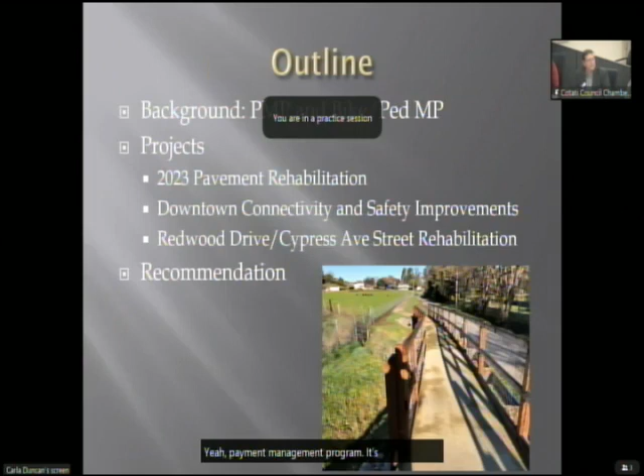These are routine pavement maintenance projects that are done methodically over the years to keep ahead of the wear and tear that the roadways undergo. This is the outline of the presentation today. We'll talk about the pavement management program, PMP, which lays out the systematic approach whereby we prioritize the roadway projects, then talk about the bike ped master plan, and then go into the 3 current projects in front of us tonight. And then we'll conclude with the recommendation. Oh, I'm advancing them on my computer, but not up there. Yeah, pavement management program, it's like the 3rd or 4th slide in. Okay, right there. Thank you. I'll try to remember to ask you to advance the slides.

So the pavement management program is a state mandated program which has a StreetSaver software program. Every 2 years, we're required to have that updated to remain eligible for federal and state street grant money. It involves an inspection of each one of our street segments. We have something like 200 plus street segments that are walked every 2 years by a certified inspector that will categorize each segment by its condition. The condition is defined by pavement condition index from 0 to 100, where 100 is a new street and 0 is degraded to nothing.

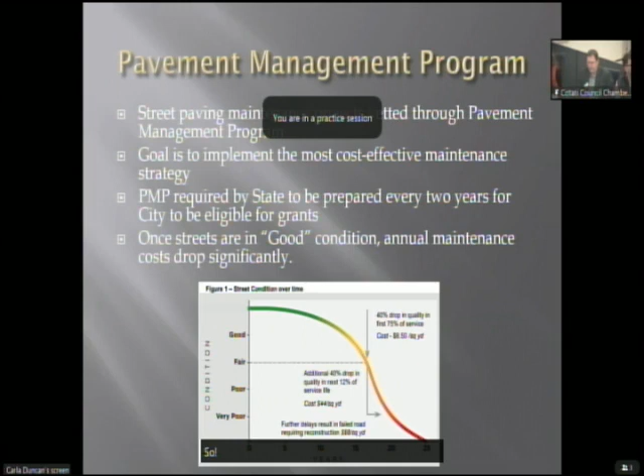Any street that's below about 26 or so is in very poor condition. We try to get our roadways up to the 70s, high 70s, or even the 80s, and that would mean annual treatments would be much less expensive. We just do very cost-effective slurry seal treatments and avoid the costly reconstruction. So just as an example, please advance the slides. Just 5 years ago, our PCI was 55, and this is looked upon as a city with its streets at risk, which means it needs attention. It's about to drop off to the very poor category.

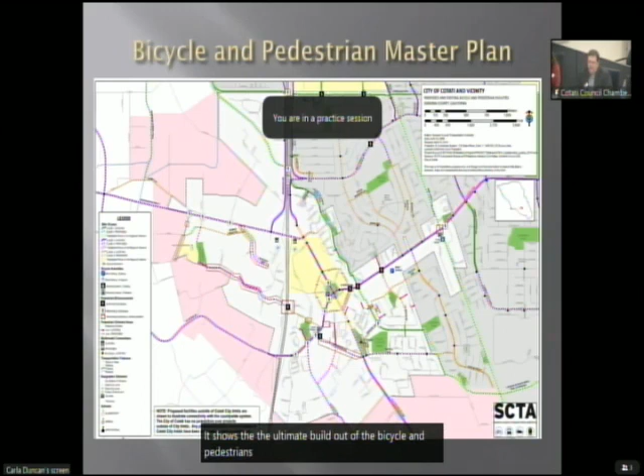The city has a bike and pedestrian master plan, and this is a figure out of the master plan. It shows the ultimate build out of the bicycle and pedestrian pathways. Then the next slide, please, shows a close-up with the legend superimposed there. Any solid line, independent of its color, is an existing Class 1, Class 2, or Class 3 pathway. And then if it's dashed, it's proposed. It doesn't exist today.

The staff refers to this figure when we have a street maintenance project. So we'll come back to this and say, oh, we're doing West Sierra Avenue, for example, and we notice that there's a purple line through it, which is an existing Class 2 bike lane. And we'll be hearing about that later on in the presentation. As time goes on, there's additional tools that Caltrans comes up with in the industry to make Class 2 bike lanes safer and increase signage, increase striping. And so even though this was an existing Class 2 bike lane, you'll see in the course of the presentation how we've managed to enhance that feature.

Also on here, on the bottom right corner, hidden by the captions, there is the dashed purple, which is Myrtle Avenue. So in contrast to West Sierra Avenue that has an existing Class 2, Myrtle does not have a bike lane at all right now, and the master plan identifies it for a future Class 2 bike lane. And that is one of our projects. That's a 2023 street rehabilitation project that's underway right now. That's going to be paving that roadway.

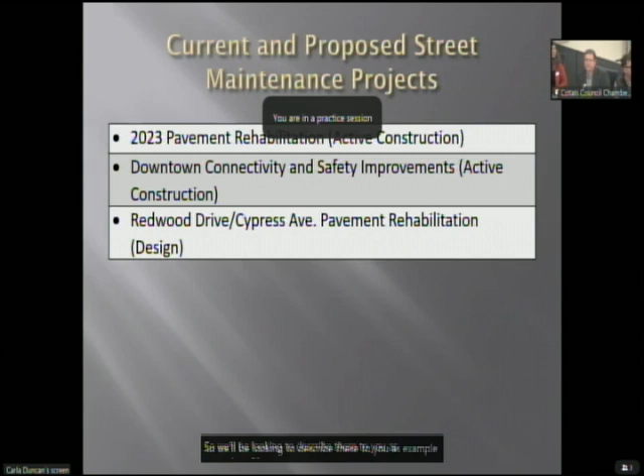And for the second project there, we've gotten a $1.25 million grant. And the first 2, like I said, are actively under construction. So we'll be looking to describe these to you as examples of how we incorporate bike ped features. Next slide, please. Okay, the pavement rehabilitation project, we just put that out. We awarded it, and the contractor is now demolishing curb ramps and getting going on that, and it will cause traffic delays in this area.

And for Myrtle, as we remember, the master plan calls for a Class 2. There's no bike lane at all on Myrtle today, and the roadway is in very poor shape, so it needs rehabilitation, which is rebuilding the street. We're planning on adding Class 2 bike lane striping. It's wide enough for a 4.5 to 5 foot bike lane on either side, and on most of it we can get a 2-foot buffer lane, but the areas closest to Old Redwood Highway, there's not enough room for that buffer lane.

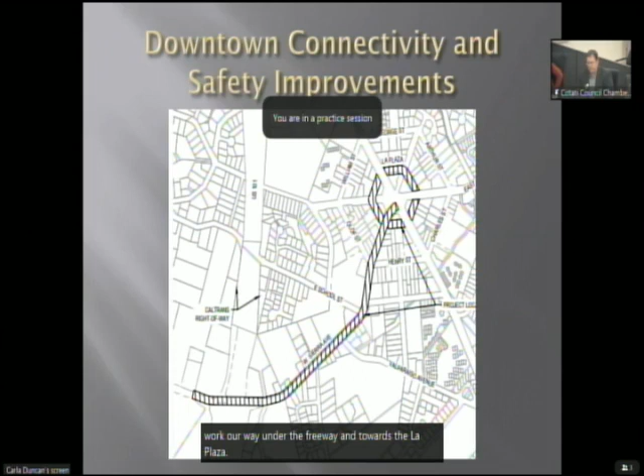So the next project on the list is the Downtown Connectivity and Safety Improvements Project, otherwise known as Quick Strike. You may have heard of it referred to that way. And we're doing the inner Hub Street, which is La Plaza, and all of West Sierra Avenue from Old Redwood Highway to the city limits. And the plan sheets, as we go through them, start on the left side of this figure and work our way under the freeway and towards the La Plaza. Next slide, please.

So as with the last project, we've striped West Sierra Avenue to put in Class 2 buffered bike lanes, and that's consistent along the entire stretch of West Sierra Avenue. There was sufficient space to do that. We've got stamped crosswalks, so you'll see these stamped herringbone crosswalks that we've been putting along Old Redwood Highway. We're going to extend that by putting them along the stretch at least to City Hall.

We've got green bike lanes and a bike box. There's a bike box on West Sierra Avenue as you approach Old Redwood Highway, and we can address that in a little more detail. What's a bike box? Okay. So take it away, Pat.

So it's basically an area at a signalized intersection that ties in with the Class 2 that allows the cyclist to get into the left turn ahead of the vehicles. It also allows for the detection for the signal to recognize that there's a bike there and give additional green time to that left turning bicyclist. So it makes it much easier for the cyclist to negotiate left turning. Thank you.

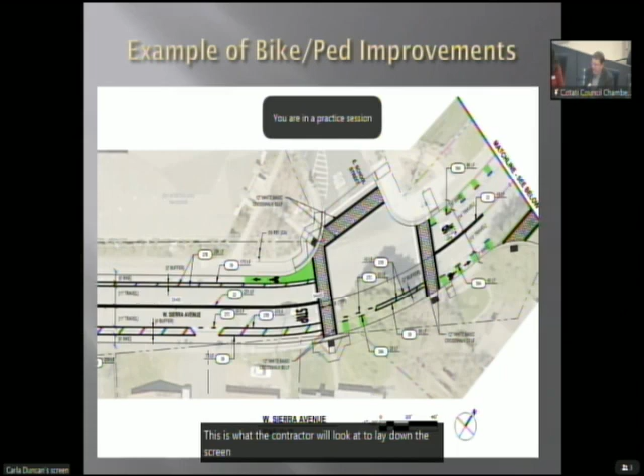So here's an example screenshot of a plan page from the connectivity project. And this is right out front here. It shows the use of the green bike paint at the intersections, the buffered Class 2 bike lane, the stamped herringbone crosswalks, and the upgraded curb ramps. So after it's all paved, this is what the contractor will look at to lay down the striping. And there's also signage. Okay, next slide, please.

Okay, the Redwood Drive and Cypress Avenue project is nearing 100% design. So as opposed to the other projects that have been designed, put out to bid, and we've hired contractors and it's underway, this one is still in the design process. We've got Class 2 buffered bike lanes, green bike lane paint at intersections, and upgrading 12 curb ramps. That's what the scope covers.

I didn't put a map in here, but it's Redwood Drive from the Park and Ride lot at 116 all the way to the city limits with Rohnert Park at Copeland Creek. Craig, I'm curious, this is the perfect slide to come up. I've often wondered, I know we've been transitioning to some of the brick look on the crosswalks versus the painted. Does one act as more of a calming device for drivers than the other?

Because people come off the freeway and they fly down here to get to City Hall, and a lot of times they don't even come to a stop here in front of City Hall. They just kind of maybe slow down a little bit and keep on going. And I know there's a lot of different traffic calming devices. I was just curious if the brick look makes somebody think that the road's a little different and drive a little slower. I don't know. I would suspect not. Especially at night, you really can't see the bricks. Do they have an impact, in your opinion?

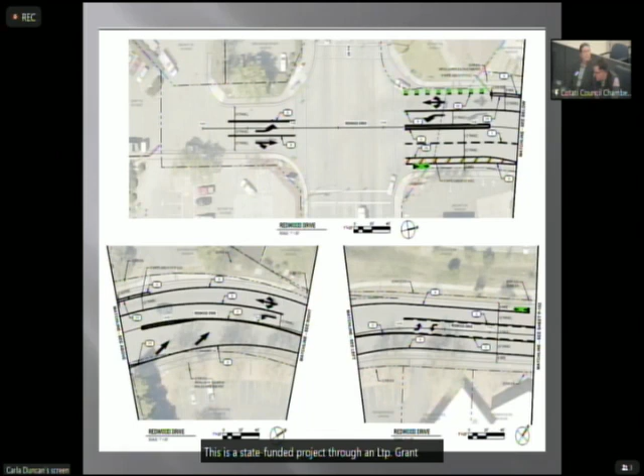The city successfully obtained, I think, 1.8 million or something. I forget exactly what the figures are. 956. But in any case, it's Redwood Drive from the Park and Ride, which is shown on the top left-hand corner, all the way to city limits, which is Copeland Creek, City of Rohnert Park city limits.

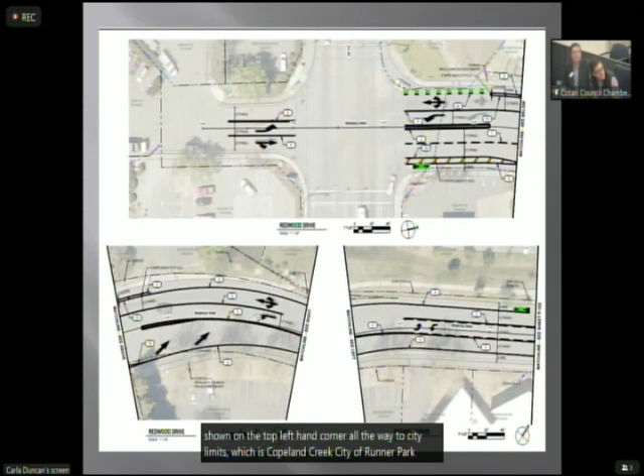And what we're doing here for ped and bikes is we're essentially, as Craig mentioned, upgrading all pedestrian curb ramps that aren't already meeting current ADA standards, and then enhancing where we can bike facilities. We're using green markings where there are conflict areas, and that's really to highlight that, hey, there could be a cyclist here, for right-turning vehicles in particular.

And since we are in Caltrans right-of-way, we do have the need to maintain the lane geometry here. So the left turn pocket, the through right left, and the two receiving lanes. That's mainly because there are very large vehicles that use this intersection, and there isn't really much more we can do to help that. But in any case, we are doing our best here to neck lanes down to a minimum of 11 feet. Add more width to the bike lane where we can't get a buffer in. So we have 6 feet minimum, which is a step in the right direction from where they were at 5 feet.

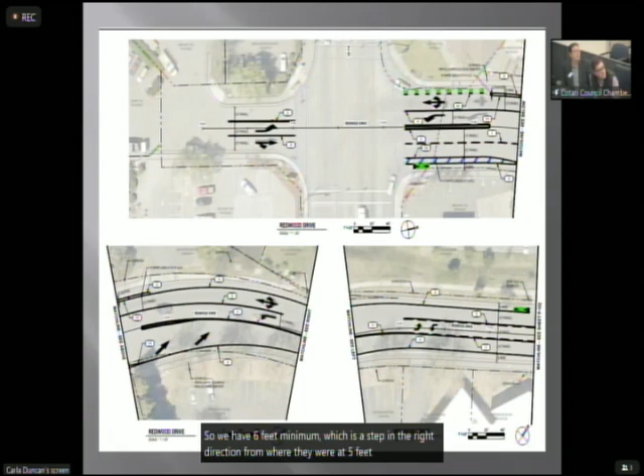And I think we can go to the next slide. And this is continuing northbound. We're adding green markings in that Lowe's entrance, right through the entrance. And we've got the signal at, I think that's Hellman Lane. Adding the green markings. And then between Hellman Lane and, I forget the name of the cross streets, but into the industrial area, the road is really too narrow to have any sort of buffer.

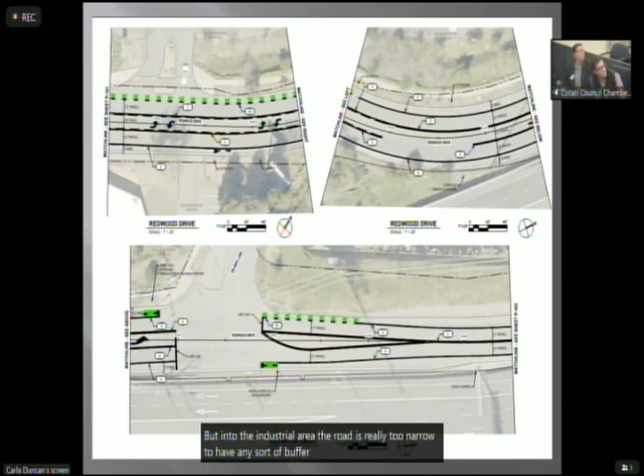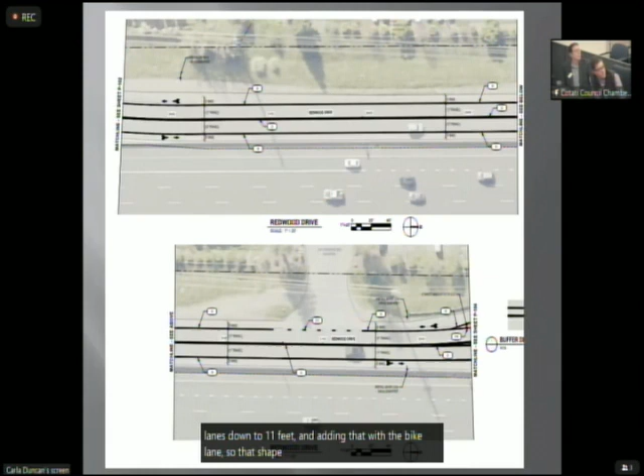Next slide, please. But we are necking the lanes down to 11 feet and adding that width to the bike lane. So that should hopefully do something for traffic calming and also provide a little bit more width for the bikes to navigate. We are up against the 101. There's the barrier between Redwood Drive and 101.

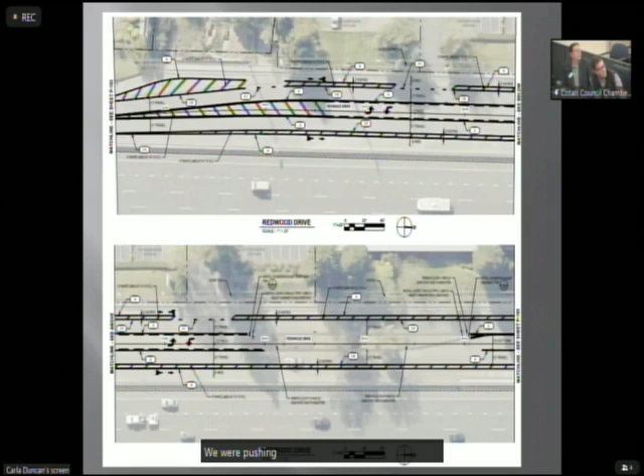Next slide, please. And then here's where the fun begins. We are adding Class 2 buffered here, so we're necking lanes down. We're also adding a buffer. There is a lot of pavement width here that's not really utilized very well, so this is going to be a better utilization for that. We're pushing the bikes away from the 101 barrier a little bit more and providing them a buffer. They're getting a buffer in both directions. Next slide, please.

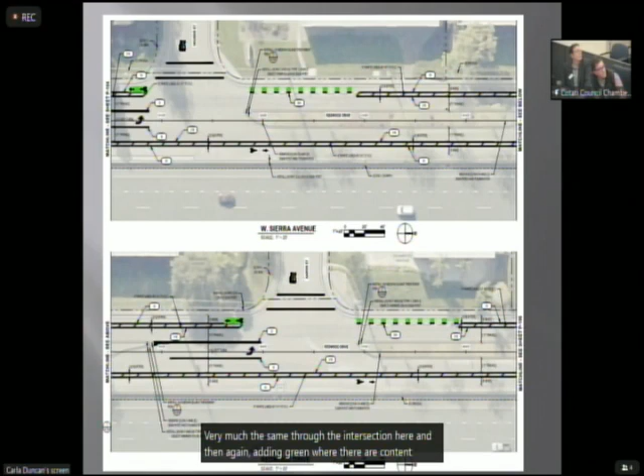Very much the same through the intersection here, and then again adding green where there are conflicts with right-turning vehicles. Next slide, please. And then we're coming into city limits at Copeland Creek. The city of Rohnert Park has got plans for a 101 overcrossing or 101 crossing of some kind that this project will tie in with without any real issue. That's Redwood Drive. Maybe I could stop if there's any questions.

I was just curious about the tie-in with what's going on with Rohnert Park. So do we share our plans with them and them with us, or? Yeah, so in particular, we're coordinating with Rohnert Park because their east side trunk sewer comes through here, and they've got a couple of manholes, so they're aware of the project. We've looked at what they have, which is basically a study and some concept plans. So we have an idea of what they're looking at, but they're not really anywhere close to really knowing what they're going to be doing there.

And our improvements are essentially striping only. Conceptually, it looks like it'll be fine. I have every confidence that it'll work out fine. They're going to be what looks to be widening the Copeland Creek. I don't know if that's a culvert or a bridge, but adding sidewalks, widening that, and making the whole experience better. I will add, we are adding share the road signs where eventually the Class 2 lane ends as we're going northbound into the city of Rohnert Park until I think it does open up again in Rohnert Park, but over the culvert, which is really narrow, of course, a little bit outside of the scope of this project.

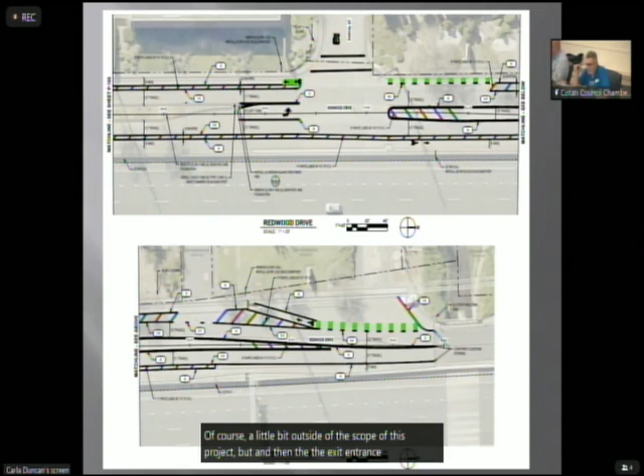And then the exit entrance into Lowe's. I know everybody's supposed to take a right-hand turn, but I go to Lowe's an awful lot more than I want to. But it's amazing how many people come out of there and go around and take the left-hand turn. So is there any way of fixing that? Because since there is almost kind of a blind corner down Redwood coming to that, people have to shoot out really fast to try to make that left-hand turn. That's something we can look at. I haven't looked at that, honestly.

I'm not even sure exactly what left turn that is, but I'll talk with Craig. I'm sure he knows. It's from the parking lot when you go out. It's designed; there's the build out there in concrete to make everybody take... You saw it on one of the slides. That's the main entrance with the big median? Right. Okay. And it's designed for everybody to exit to the right. Okay. But a lot of people do that, and go to the left.

And I think at one time there used to be a right-hand turn sign there, but I don't know if it's there any longer or not. Maybe run over. Yeah, I think it was flattened recently. Better channelization potentially, or better curbing. Yeah, there's only so much you can do about poor behavior, right? So hopefully the striping is going to slow down the traffic, but it looks like that turnout saw that as an issue, and that was their solution. Yeah. It seems like that.

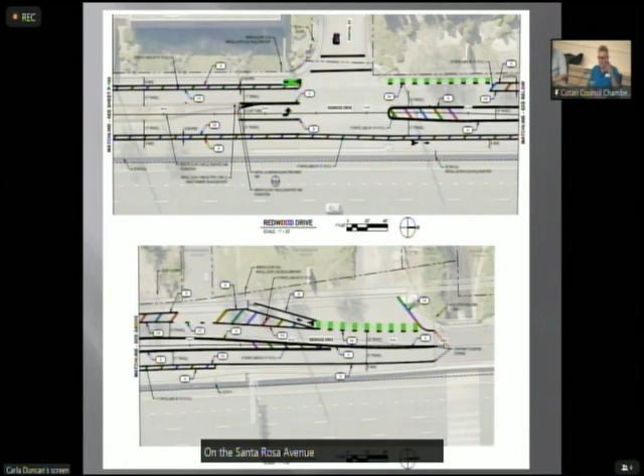I know, like on Santa Rosa Avenue, one of the shopping centers, there's that same type of thing where you have to turn right, and they actually have extended the little bump out a little further, so that way when you come, you really do have to take that right-hand turn unless you want to drive over the top of it. Okay, yeah. Thank you for the comments. Do you want to go to Cypress? Yeah, we'll go to Cypress real quick. I have one more question.

Oh, yeah, sorry. We received a late letter from Neil, and he comments on a section of Redwood Drive where the Copeland Bridge is. Is that in one of these diagrams? Yeah, it's actually the bottom pane, the right-hand corner. That's where you can kind of see it goes across the 101. It's that concrete patch. So that, I believe, is a culvert. Some people might call it a bridge. And so, yeah, the roadway is fairly narrow across that. And there's nothing in here that addresses any widening of that, or no.

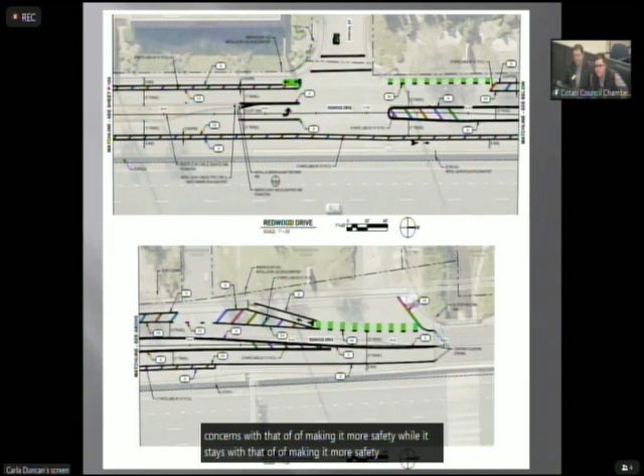Is there anything that addresses any safety concerns with that, making it safer while it stays small? Yeah, so we are adding share the road, so it's a warning sign with a bicycle on it, and it'll say share the road, which is better than what's there. Signage. Yeah. And as we had mentioned, we're coordinating. We're looking at what Rohnert Park's plans are with their pedestrian crossing of Highway 101. But that, as Matt said, is at least 5 to 8 years out.

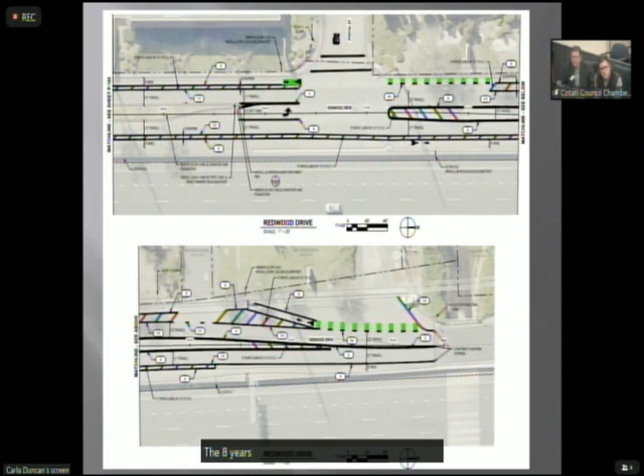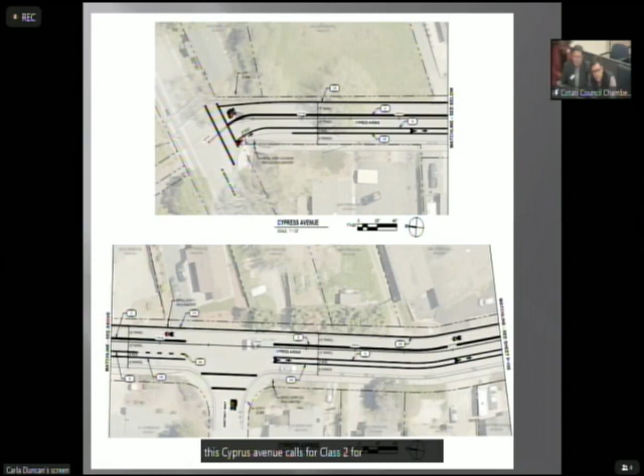Next slide, please. The other part of this project is Cypress Avenue, and that's from West Sierra to city limits, which is just past McKinnon Court. As Craig pointed out in the pedestrian and bicycle master plan, Cypress Avenue calls for Class 2 proposed. However, the current width doesn't really support that. What I believe to be the case is that as development goes in and these areas urbanize, they'll be conditioned to do some frontage improvements that'll widen the road. At that point, then we can get Class 2 the entire way.

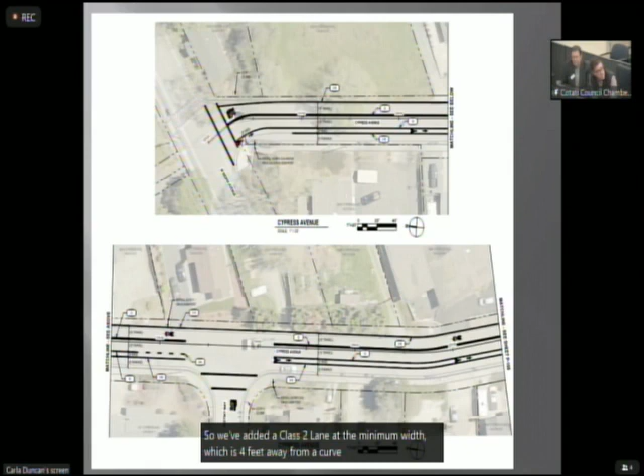But the reality is, we've had to prioritize and think about this a little bit. There's quite a grade going up from West Sierra, so having a Class 2 bike lane in the uphill direction made the most sense with the available space. So we've added a Class 2 lane at the minimum width, which is 4 feet from a curb, 13 feet min with on-street parking. So we're not removing any parking. All the way past Orteski, where it then transitions to a Class 3 with share the road markings and signage. And you can see we also have Class 3 share the road markings and signage in the opposite direction, northbound versus southbound. Next slide, please.

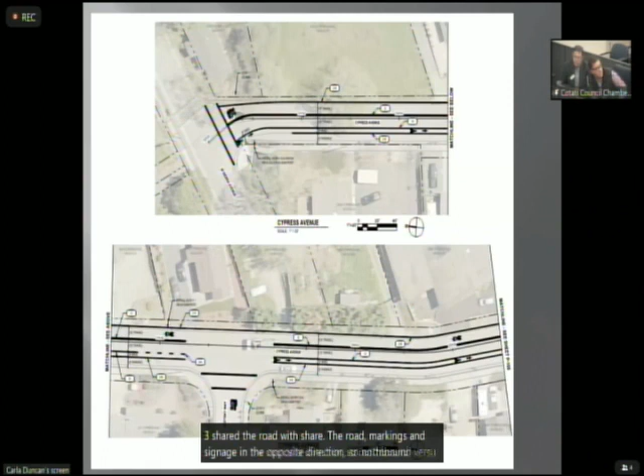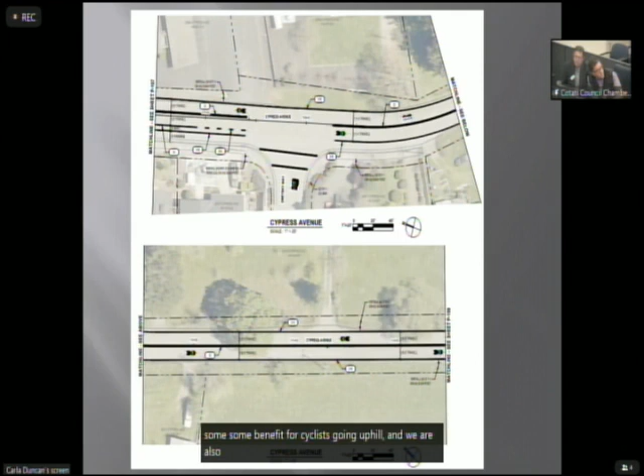So the top pane here shows where we transition from Class 2 in the southbound direction to a Class 3, and we're just about at the top of the hill there. It is rolling beyond that, but that does provide some benefit for cyclists going uphill. And we are also upgrading the pedestrian curb ramps, which I failed to mention a second ago; all the existing pedestrian curb ramps are getting upgraded. Next slide. And this continues on.

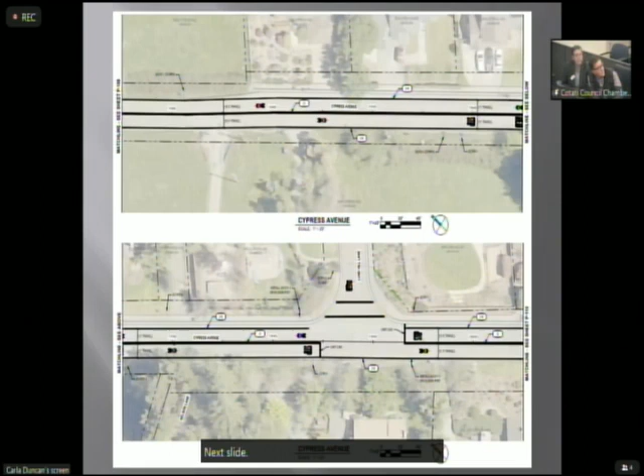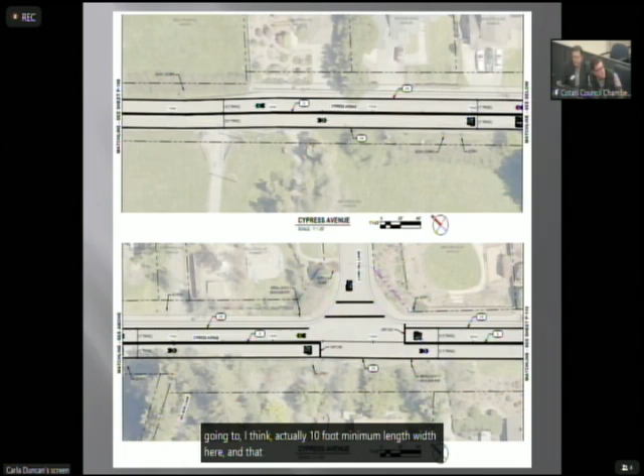We're going to, I think, actually 10-foot minimum lane width here, and that's because it's more of a local street, and there's less heavy vehicles using the facility. And that allowed us to get the Class 2 in earlier. And this maintains Class 3 all the way to city limits with shared road markings.

Next slide, please. So on that slide there, that's the area that I'm most concerned about, because since the new houses have gone in, people are using it from Valparaiso, Lund Hill, Cypress, they're doing that as their walk, walking their dogs, their biking. And in the last couple of years, I'd probably say the foot traffic has increased tenfold. And there's no room on either side. Yeah. And so people are either getting into the bushes, or the cars are constantly going on the other side of the street to get around them.

And then the stop sign there down the street is another one that, unfortunately, the one sign just before it, the street sign, isn't really highly visible, and people blow through that stop sign all the time. So maybe, as far as the stop sign goes, we can enhance, we can add beacons potentially. Well, that I think would be an excellent start. Yeah, we hesitate to add rumble strips because those create noise, and then that creates a nuisance issue. So that might be something we could potentially add to this project.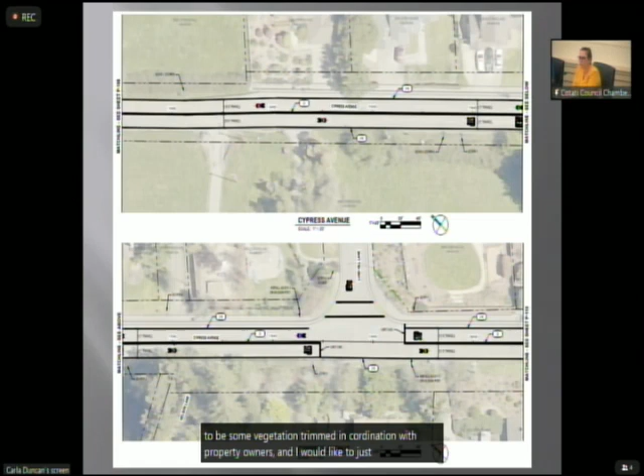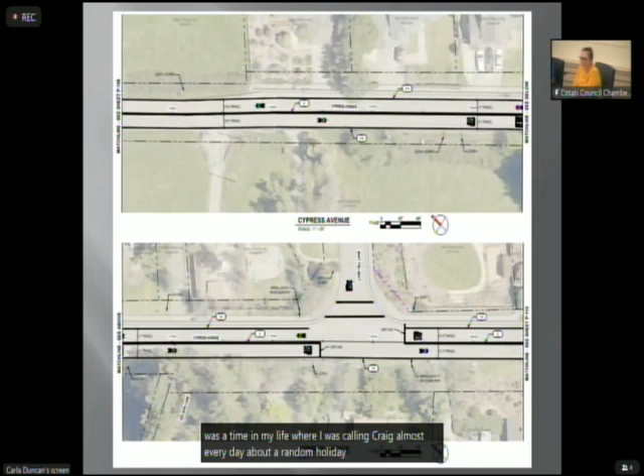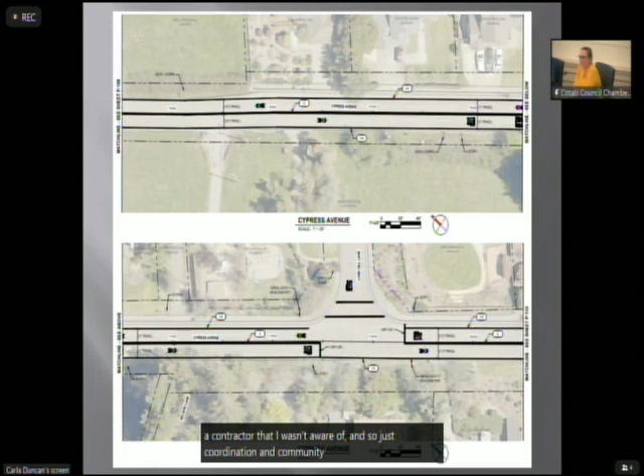I also know that on the plans here, it says that there's going to be some vegetation trimmed in coordination with property owners. And I would like to just stress how important coordination with property owners is. I think there was a time in my life where I was calling Craig almost every day about a random hole that appeared in my yard from a contractor that I wasn't aware of. And so just coordination and communication is amazing. And I'd love to know how you're going to be communicating with the property owners.

So it is a condition of the construction contract. The vegetation trimming for this project is extremely minor. It's actually just overgrown within the city's right-of-way. We're not going on private property on this project. I think in the one location, it's a curb ramp that's so overgrown that you can't even see that there's a sidewalk there. So that's this particular project. But in general, yes, where we're impacting residents, we always try to reach out. And during construction, that is going to be a requirement, and the city's team will be coordinating that.

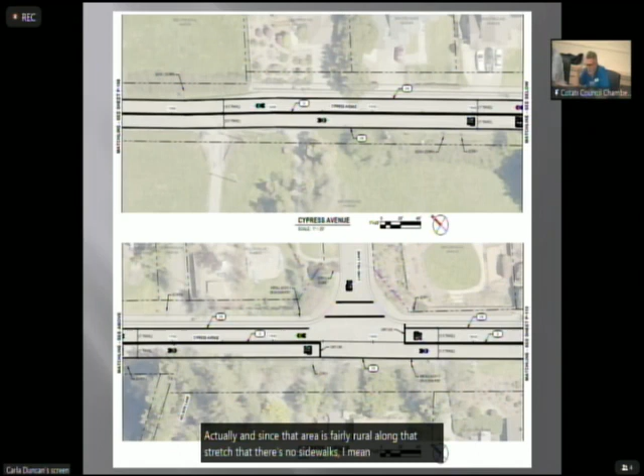Yeah, on the vegetation too, because I know some of those trees are right there on the roadway, and the overhang is really pretty low. I mean, the UPS trucks, a lot of times they rub against that stuff. Yeah, that is a challenge with paving too. So the contractor, with the help of an arborist, does have to trim the canopies so that they can actually pave the road. And since that area is fairly rural along that stretch, there's no sidewalks. I know you said about rumble strips, the noise problem, but since there's really not many homes along there, I think that would be a good thing to help slow some people down.

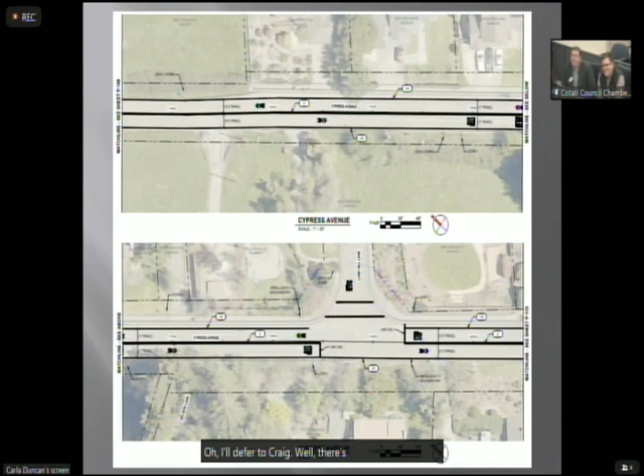I'll defer to Craig. Well, there's unintended consequences too, like for the bikes, right? The bikes are going downhill through there and hit these rumble strips. That could be a safety hazard. They are easy to remove. It's one of those things where you could try it and remove them if they become a problem too. But that's essentially, if we go to the next slide, well, okay, so it winds around a little bit, but it's essentially the same thing.

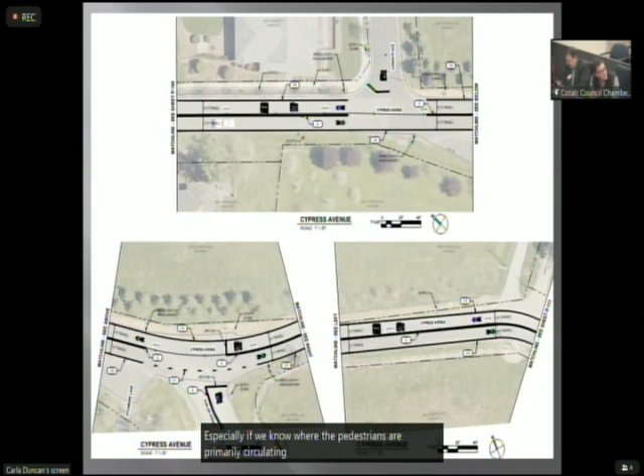And yeah, we can look at adding a few more pedestrian warning signs. I do know that there's quite a few out there already, especially if we know where the pedestrians are primarily circulating. And next slide, please. Can I ask a question? Yeah. Sorry. There are streets that are dedicated for bicycles that have an 18-mile-per-hour speed limit. Is there a way to dedicate Cypress to be an 18-mile-per-hour road?

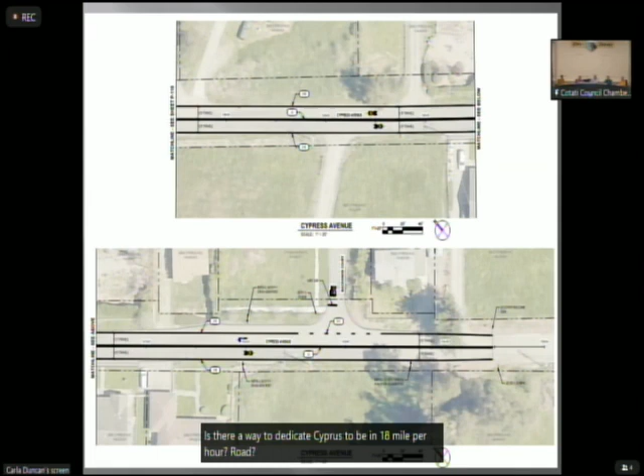That is the speeds. The speed limit needs to abide by the state's traffic and prima facie, or state's vehicle code, which is very strict on it. You cannot set a speed limit less than the 85th percentile. So devices are put out there to measure the volume, get a vehicle count and what the average speed is, and then it gets graphed, and whatever the 85th percentile is, that's what we have to set the speed

limit at. So that's why these traffic calming features are so important, because if we can get people to slow down just responding to the street conditions, and go out there and do a speed survey and the speed limit comes down, we can then post a lower speed limit. But we can't just de facto put a speed limit out there that people are going to violate, because then we'll get a lot of tickets. So we just have to abide by that.

Do you want to? I think that wraps it up. Oh yeah, I think after this, I'll turn it back to Craig. Next slide, please.

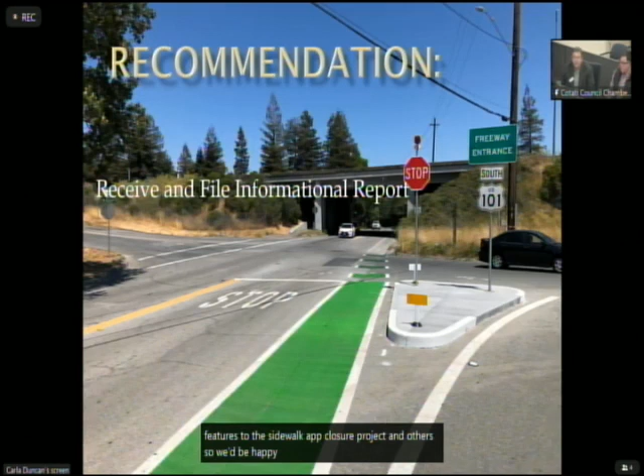With that, I know we've been answering questions throughout the presentation. This is an informational report. It's a non-action item. So coming out of this, we'll take our notes and look to ways of enhancing the Redwood Drive Cypress project in the ways we talked about, and to add features to the sidewalk gap closure project and others. So we'd be happy to answer any additional questions that you might have. But that's our presentation.

Additional questions or comments from the commission? No. All right. Since this is an information item, do we still go to public for comments like we do on resolutions? Yes. Okay. All right, if there are public that wish to speak on this item, we will turn this over for public comment then.

Okay, I got lots of them. Please don't make me keep them to 2 minutes, but I won't go too long. So starting from the macro and going to the micro, and talking about the pavement management program, I would really love to see the Class 1 paths get added into that program, because some of them are in really bad shape.

There was talk about redoing the one that's on Myrtle, and recently the ones at the end of McGinnis Circle that go over the 2 bridges and the little area there have been redone, but the Laguna Trail from East Cotati to Commerce is full of potholes and bumps and big gaps, and that really needs to be redone. So I would love to see those things get added into the pavement program, because they are pavement for other kinds of transportation. So that would be a great thing to do.

The 85% rule: there was a new law passed in the last year that actually allows the cities more leeway in setting your speed limits. So that old paradigm is no longer the 100% law.